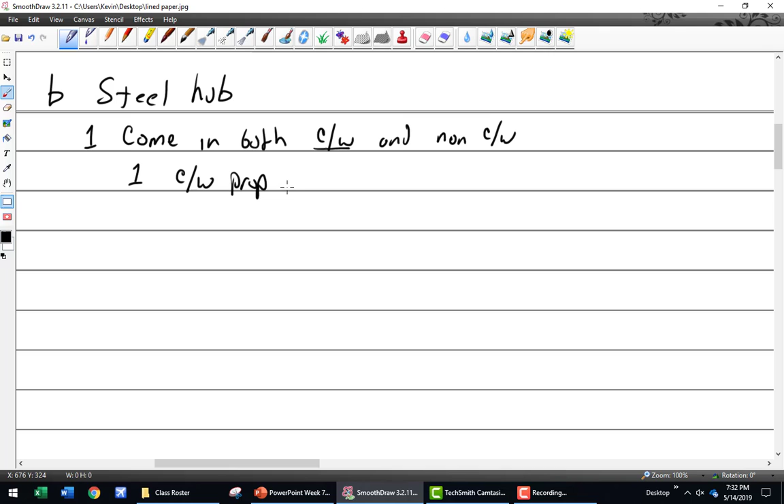While we're here, the counterweighted prop, as a reminder, uses oil to decrease pitch. And then the non-counterweight uses oil to increase pitch.

We do have in the hangar a couple examples of the steel hub. One of them's stuck in a feather position, and you need air pressure to get it out of feather. When you look at that propeller, take a minute to go around to the back of the Bonanza and look at the PT6 sitting there at the propeller and tell me if you see any similarities. I think you will.

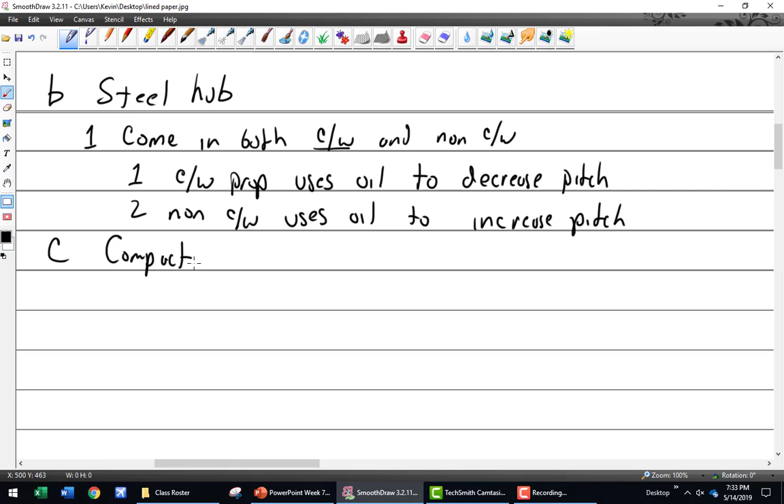All right, the compact hub - that is the more modern style, and it uses an aluminum hub.

Basically, it's the same thing. I mean, we can keep writing it over and over, but let's not. If it's got counterweights, what are the counterweights going to tell me? Centrifugal force is going to take it to high pitch, oil pressure to low pitch.

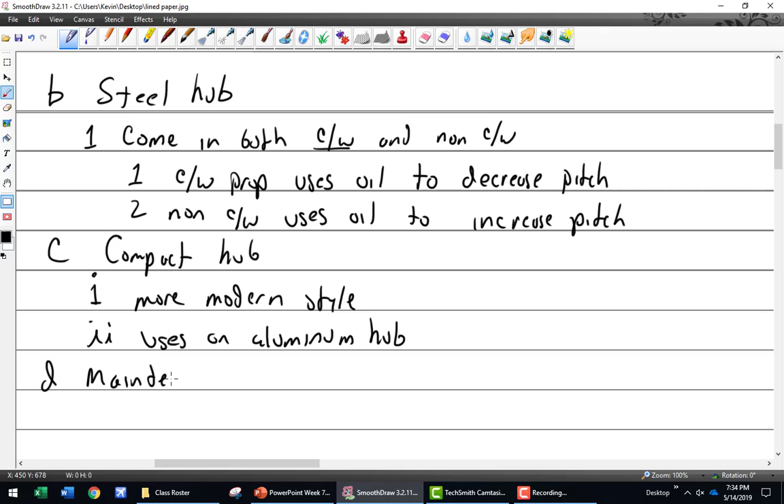I like the maintenance part. So we talked a little bit about greasing - compact props require greasing.

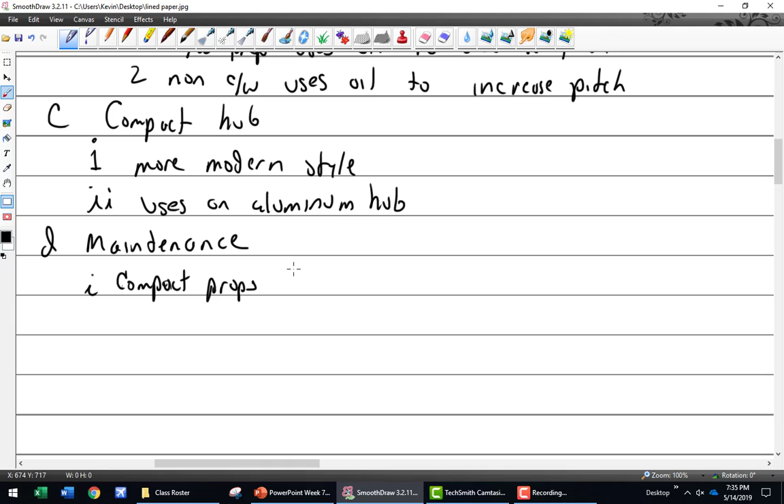What did you discover today with your assignment? I asked Jonathan and company to look up the instructions for greasing the Hartzell propeller that we have attached to the Lycoming. It says every 100 hours or 12 months, whatever comes first.

But if you are operating the propeller less than 50 hours within 6 months, you actually have to re-grease it every 6 months. Then on top of that, depending on where you're operating it - if it's in a salt water kind of environment, close to the ocean - then you actually always have to re-grease it every 6 months.

The amount with which you have to re-grease it, take the fittings out. So here's the part - to grease it, we have the hub, very crude hub, the blades coming out of each side, and we've got one grease zerk here, one down here, one up here, and one over here.

Depending on if it's a tractor or a pusher, you will either take the top or the bottom one out. So we have a tractor, so you have a tractor.

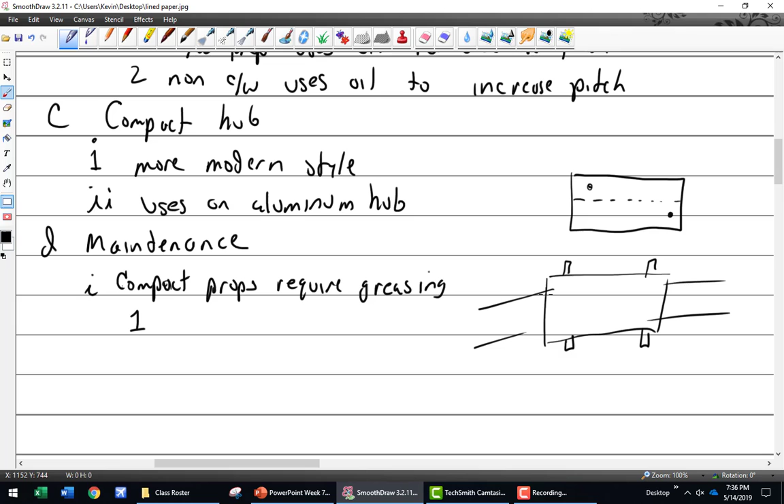So I'll write this down. Tractor style. So what does it remove? It's actually counterclockwise or clockwise. The revised version? Really? Yeah. All right, well, let's go with what you got.

General instructions: remove one of the grease fittings, and then grease it with 1 fluid ounce, which is equivalent to 6 pumps.

You guys got it? That's what it is, right? So you add 1 fluid ounce, which is 6 pumps of grease with a regular grease gun, and then put it back on. It also depends on, there's a little sticker on the hub which tells you which grease to use.

So they were recommending to use Aeroshell number 6, which doesn't have temperature restrictions. If you use Aeroshell 5, which you could also use, you have to label it, and you can't use it below -40 degrees Celsius.

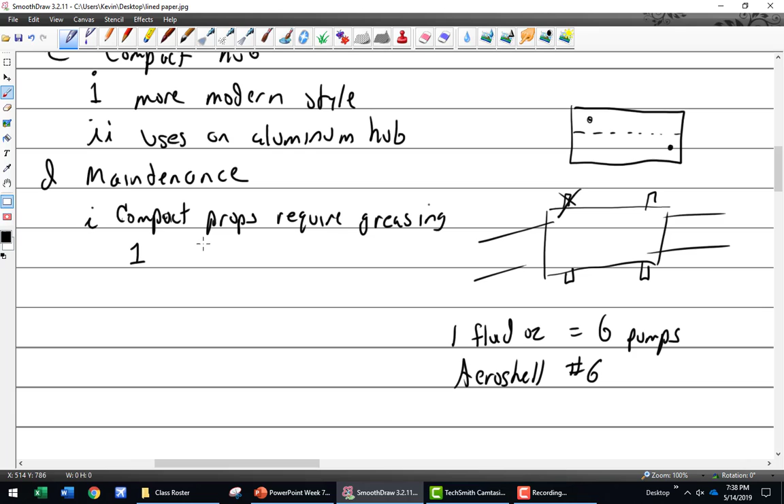All right, so what do we got? Very good, thank you. Compact props require greasing. So, 1: follow the manual, that's the most important thing. Remove 1 grease fitting.

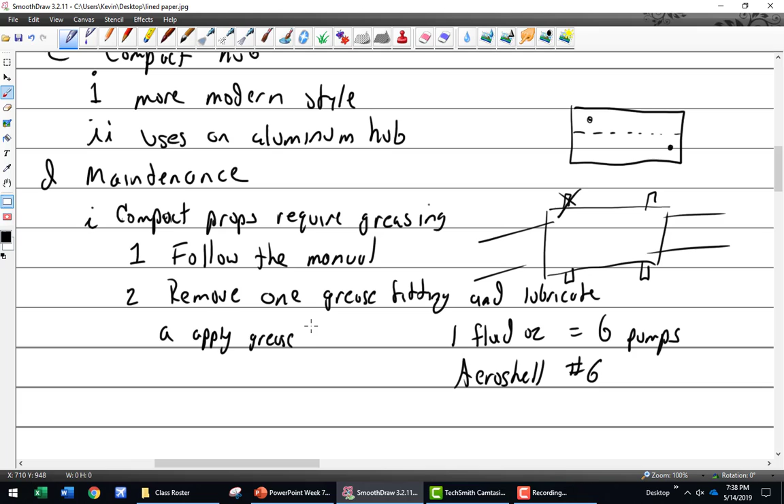And lubricate. Apply grease to the fitting nearest the leading edge. And that's for a tractor style, which would be all normal props.

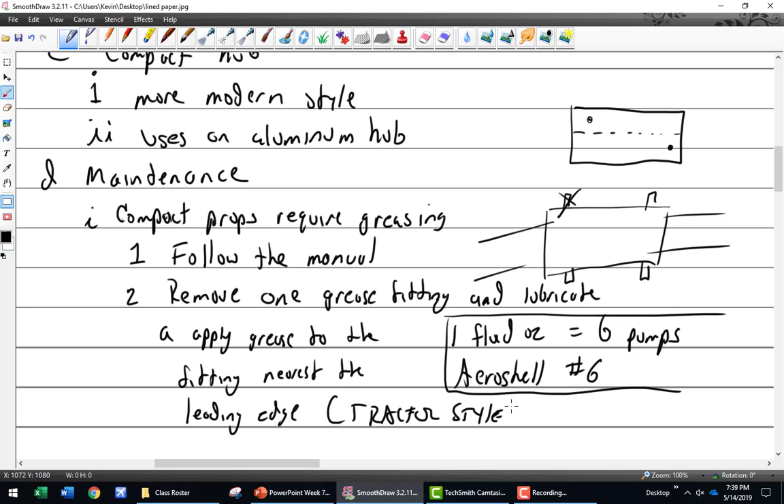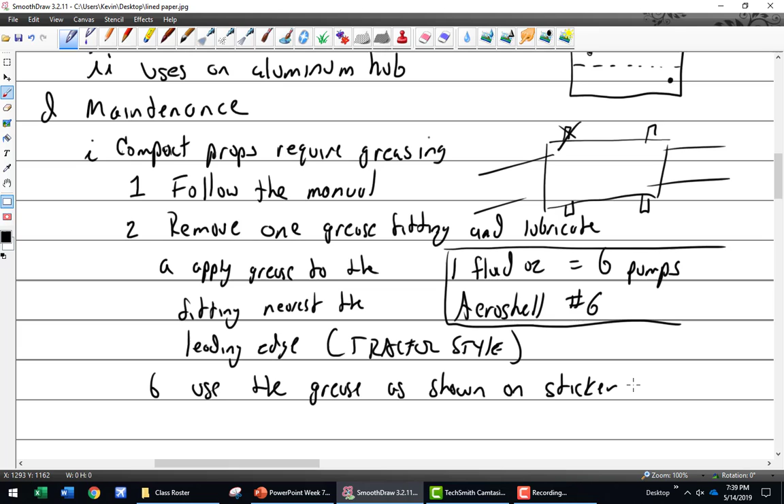Use the grease as shown on the sticker. What if the sticker's gone? Well, then I would call the prop shop and say, what do I do now? And C, it is 1 fluid ounce or 6 pumps.

All right, so let's think about what happens if somebody, not in this class, sees the grease zerks and thinks, I should definitely put some grease in this prop. Without taking out one of the grease zerks, they see 4 of them and think, well, I'll put some in this one and that one and that one and that one. Where is the grease going to go? Well, it will go into the hub, and it's going to pressurize it, and if there's enough room in there, then it'll be fine, I suppose.

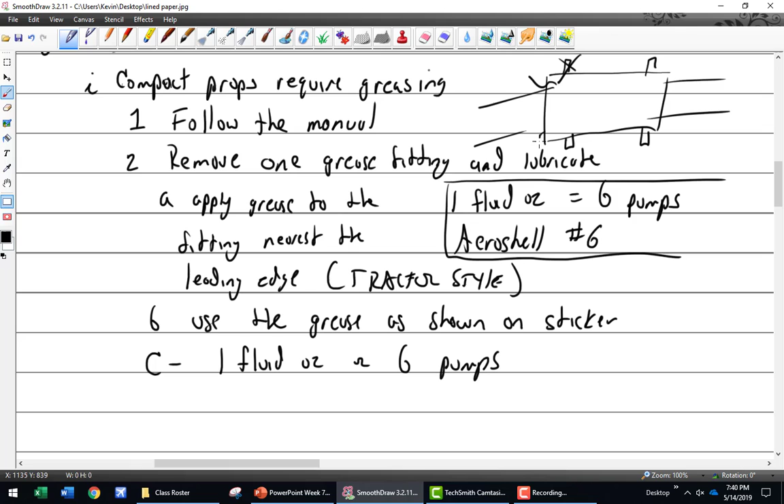But eventually, it's going to fill up. It'll come out of the seals of the prop, and roll down here, and then you have bad seals, and you got to get it cleaned and resealed, and that'll probably lead to an overhaul. Who knows? So that's really bad. So don't do that. All right.

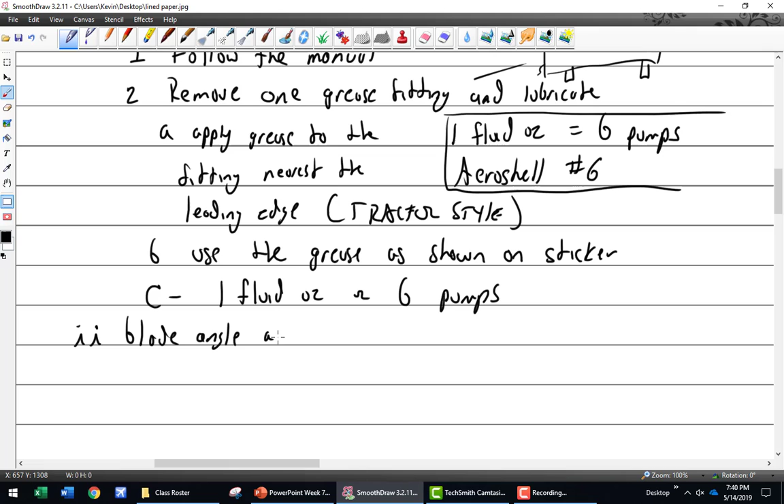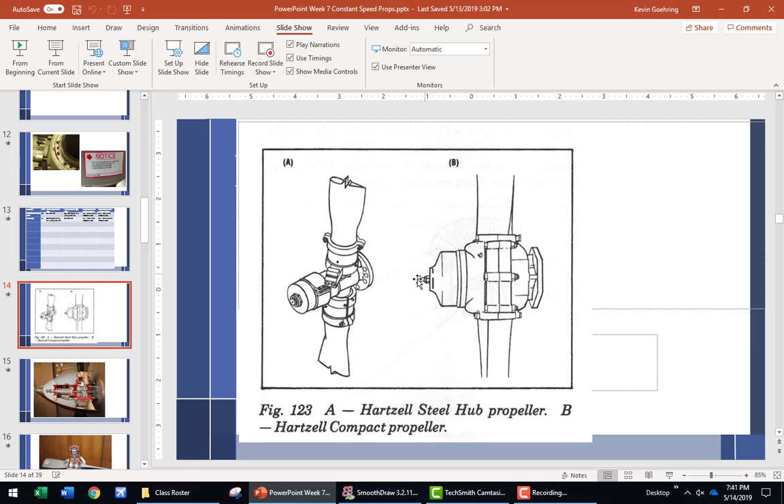One of the things I like about the compact hubs is that you can adjust the blade angle. You can do that with the steel ones too. The steel ones, you loosen the clamp, and then the same way you adjust your ground adjustable, you actually adjust it. I don't like doing those, but this one's really easy. And normally I don't like doing a whole lot with props, because there's just a lot going on.

But I can adjust the low pitch stops right here. There's a screw, usually not a bolt, usually an Allen wrench, and a stop nut. Undo the stop nut, turn it in, and you can adjust the low pitch stops. So you can actually adjust it here instead of at the governor. Don't do it unless you follow directions, but it can be done.

All right. Blade angle adjustment. Let's see. 1, steel hub props. Steel hub props can have low pitch adjusted by adjusting the blade clamps.

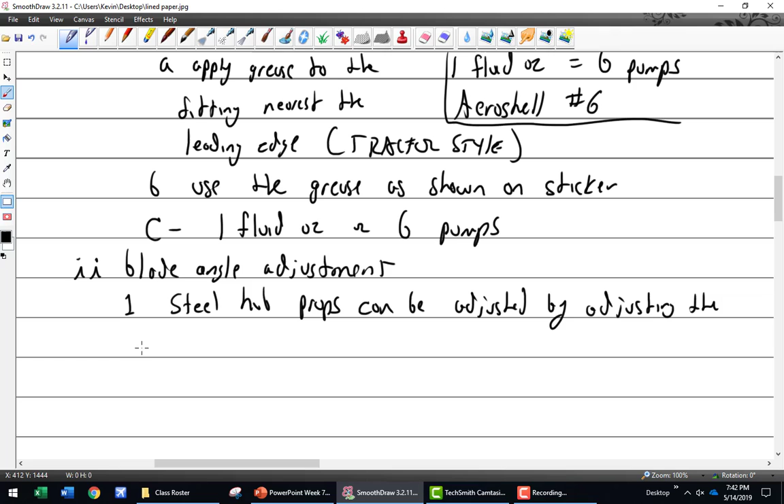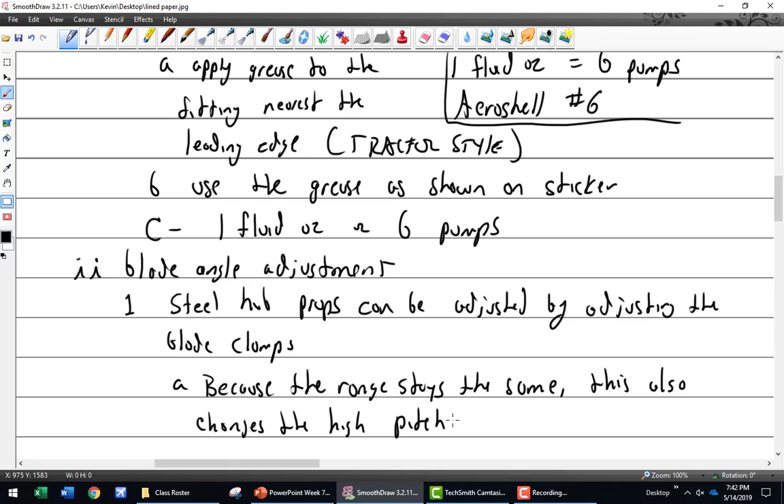This also changes the high pitch. And to the compact—

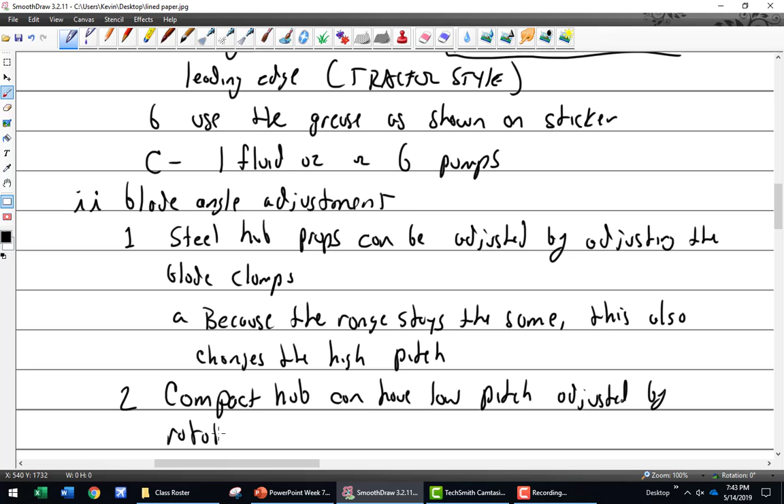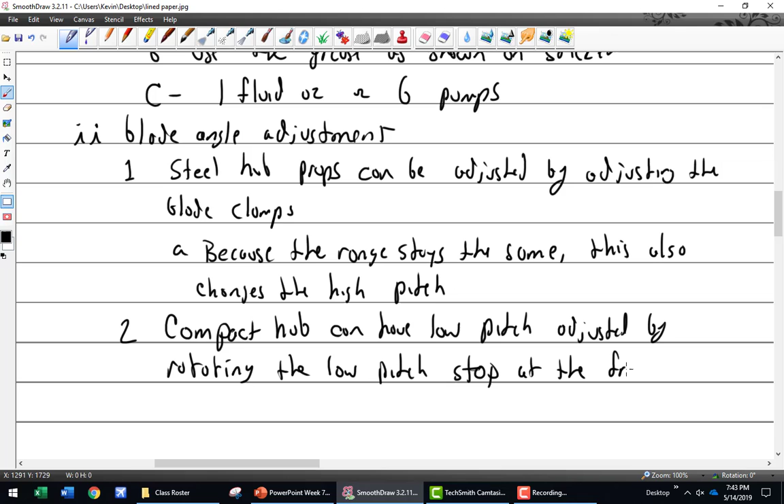Compact hub can have low pitch adjusted by rotating the low pitch stop on the front of the cylinder, by rotating the low pitch stop at the front. There we go.

So what have we really talked about, which props? Pretty much, well, we talked about the Hartzell, which is what we talked about there. We had the McCauley, and then Hamilton counterweighted. All right.

And let's bring it up to feathering props. But before we do that, we'll jump over to here. Finish up on this—so we had Hartzell, did the steel and the compact.

There's the inner workings. So what do you suppose this one is? Steel hub. Why do you say steel hub? Boy, it's hard to tell with that thing. Because the mechanism is outside—we have some mechanism here, but I don't see any up here. It's on the other side. No, I don't know, maybe that one's a little hard to tell.

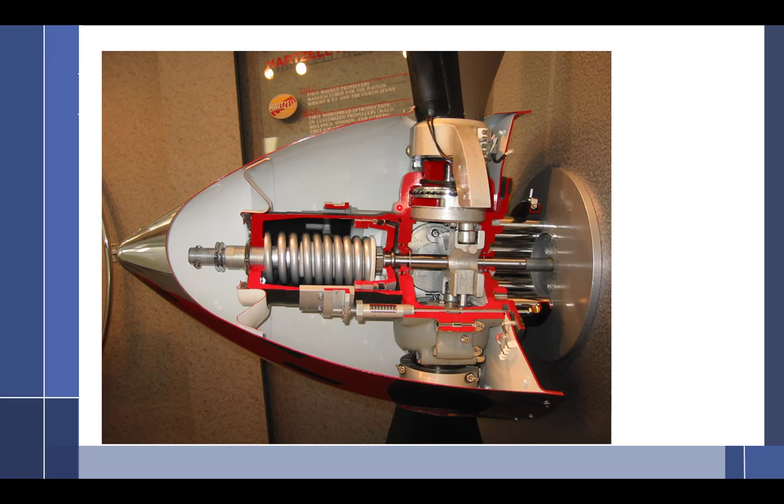All right, but we didn't even get into this. This one's feathering, and I can tell because of the distance between here and here. So we'll talk about that one.

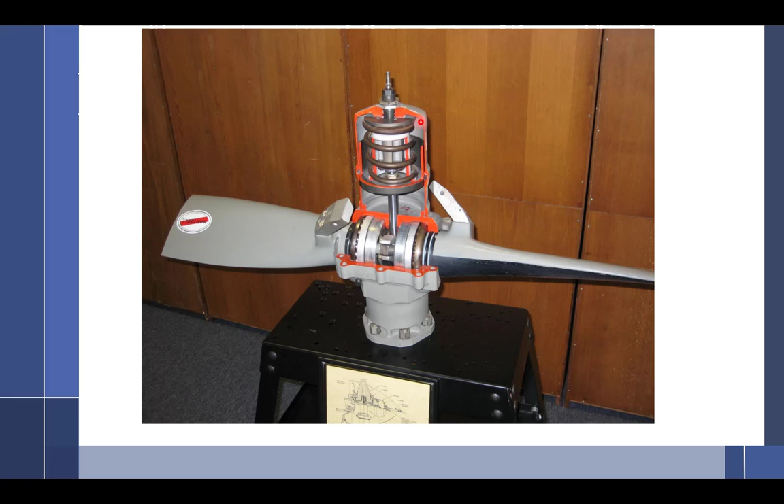Another Hartzell. Oh, this one's easy to tell—this one is compact hub. Is it feathering or non-feathering? Yeah, it's feathering. First of all, because it's got counterweight, so it's going to go on a multi-engine, and the distance between here and here is much greater. If it was very short right here, then it'd be non-feathering.

So I think we'll be looking at these in a little bit. There we go, we can look at that. So we talked about the Hartzell steel hub non-feather and the Hartzell compact non-feather. Do we have counterweights? No.

What moves the prop to low pitch? Centrifugal twist. Centrifugal twist. What moves it to high pitch? Oil pressure, oil pressure. You seeing a pattern? I hope so.

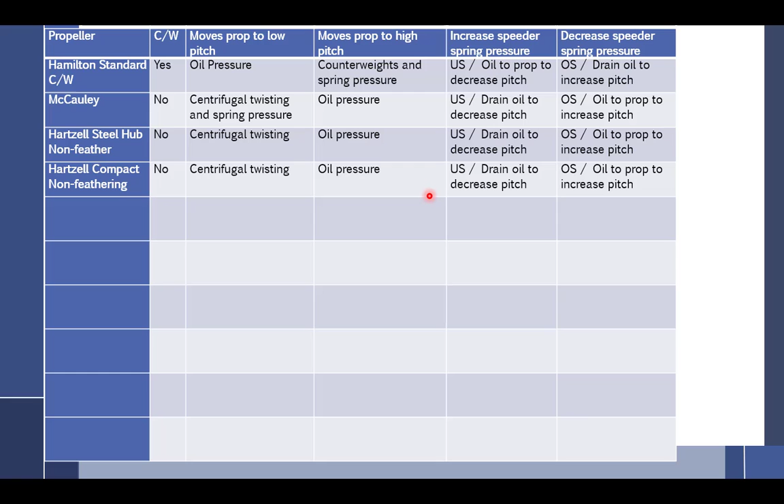All right, feathering props. What's the purpose of a feathering prop, which you've really already talked about? Why do I want it to feather? Keep it from windmilling. What else? So windmilling, huh? Reduce drag. Drag, okay.

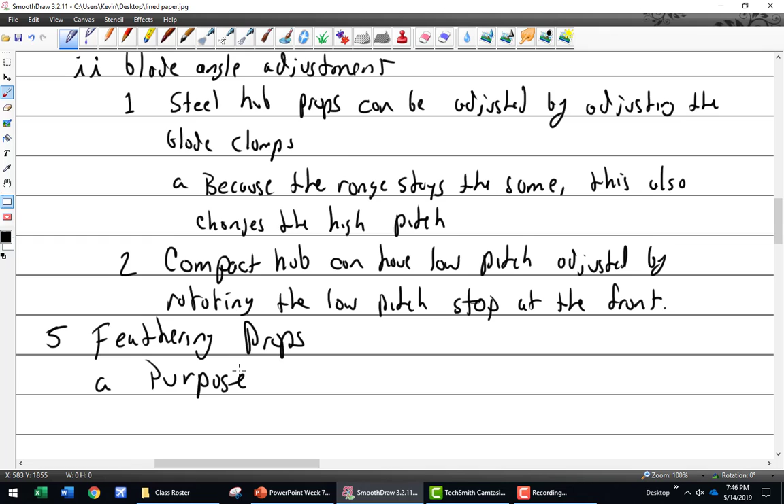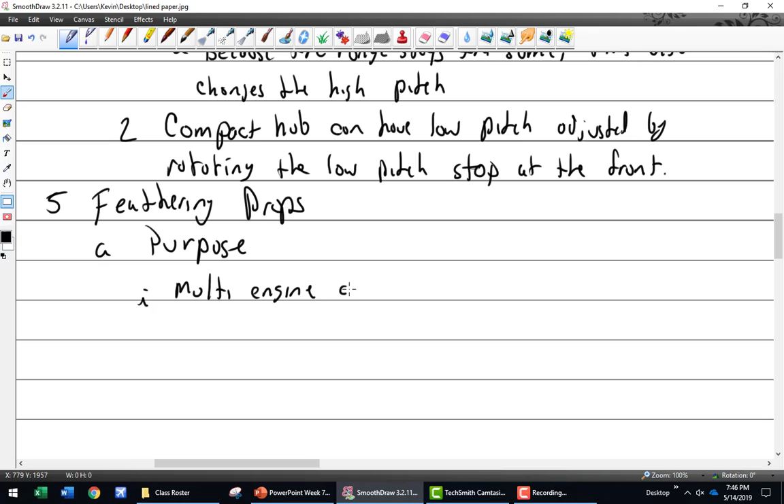Prop motoring the engine—prop motoring the engine, I like that one. Multi-engine aircraft require feathering props to reduce drag.

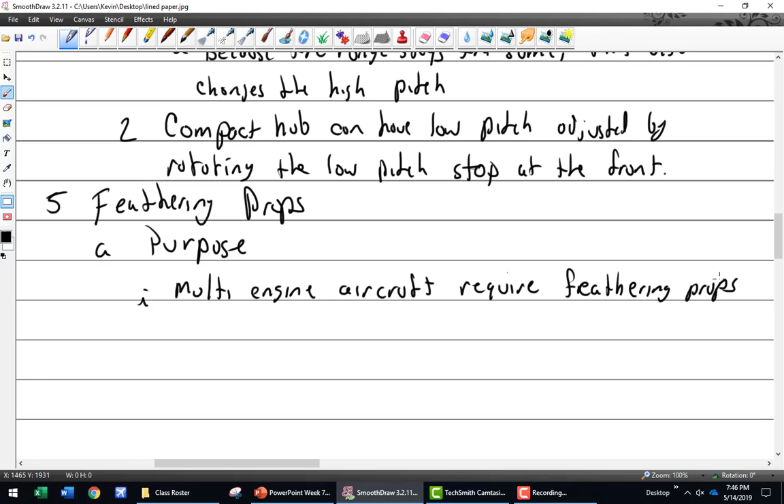Should that engine quit, it's very important to feather the engine that actually quit, and not the other one.

So feathering—what feathering means is to rotate the propeller about 90 degrees, which is the blade directly into the wind, in order to stop the engine from windmilling. So feathering a prop means to rotate the prop

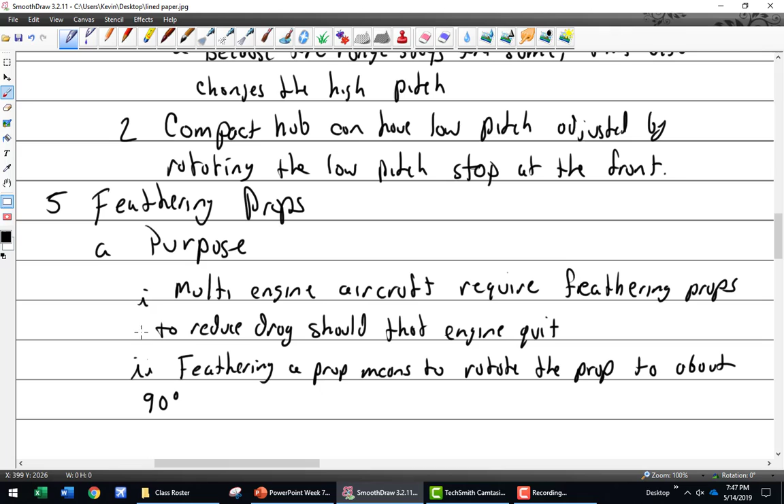to about 90 degrees, yeah, a 90 degree blade angle, which is blade directly into the air. Well, that doesn't make sense—but directly into the, what should we put here? Relative wind is perfect. I like that, directly into the relative wind.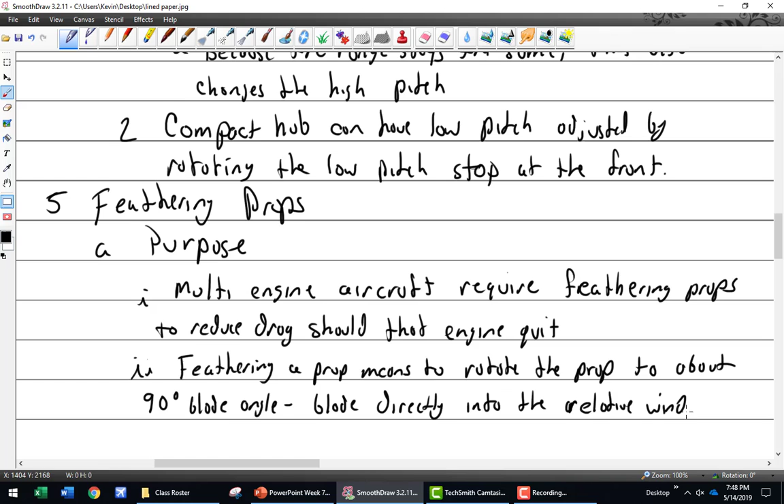And the relative wind is coming straight at the aircraft because the engine is not moving. If the aircraft is moving, the engine's not moving. If the engine were moving, then relative wind would be somewhere else, and why would you be feathering it, right? All right, directly into the relative wind, I like that.

In order to stop the engine from windmilling.

I don't know of any piston aircraft that has a feathering prop—it's single engine, so very few, if any, single engine piston type aircraft use feathering props.

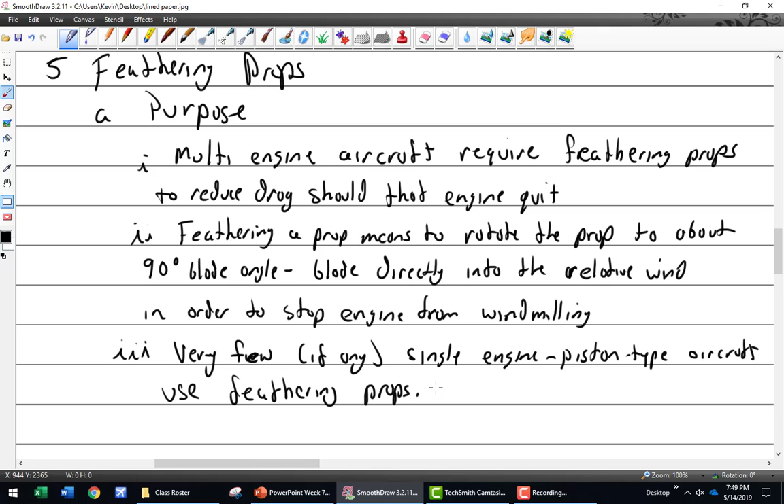However, turbine engines do, so that would not be so uncommon.

And why does everything go backwards once we get into feathering props? I mean backwards, the airplane doesn't go backwards, but why do we have this whole problem? Wouldn't it just be a lot easier to say, okay, governors always make props go to high pitch, and centrifugal twisting force always makes the prop go to low pitch? Wouldn't that be a lot easier?

Sure, but that's not how it works. Well, why not? Why couldn't we make it that way? Because now you most likely have counterweights on it, which is usually used for feathering. Well, they had to put the counterweights on.

Well, why not? Why couldn't we just use oil pressure to make this thing go all the way to feather? Because we won't have it. Because what if you lost oil pressure? What if you lost oil? Exactly. I will get into that later.

So yes, everything goes a little bit backwards. Well, I don't know, then I guess you have to ask the question: then on singles, why didn't they make the singles work that way—oil pressure bringing it to low pitch and just letting centrifugal force off counterweights make everything go to high pitch? I mean, why do they go back and forth?

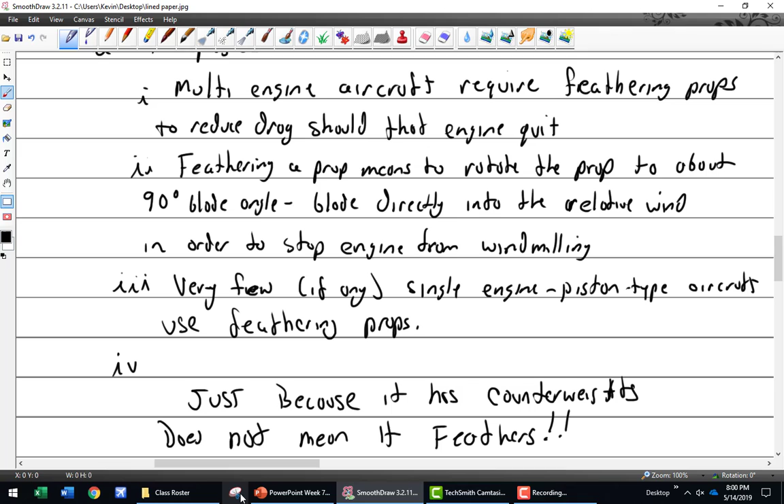So, anyway, that's what I get for trying to have a decent conversation with you guys. It just goes to hell in a handbag. Ten minutes later it's like, because it feathers? Oh no. I don't know, let's restart. Let's go again, start from the top. Turn off the recording. This didn't go well.

Well, do I want to write this? In the event of an engine failure or loss of oil, the prop needs to feather without the use of engine oil. I better write that down: in the event of an engine failure or loss of oil, the prop needs to feather without the use of oil.

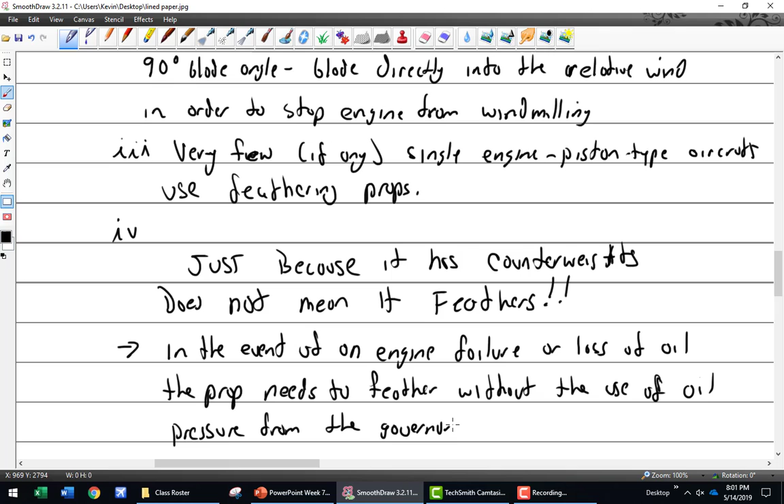From the governor. That was never in dispute, if you relate to the conversation. That is why twins are set up the way twins are. That's a given, an easy one to figure out. There's not much involved in thinking that one through. If you have a loss of engine oil or a failure of the engine, you must be able to feather your twin. That's why they're made that way.

I just found that the reason a single does not feather is because if there's governor failure, you can still fly the plane. Or if there's governor failure and it feathers, it will feather and you can't fly the plane anymore.

Okay, let's get this straight. But on a single, my question never had anything to do with feathering. The reason... why didn't it just go to high pitch? Because of governor failure - if the governor fails and it goes straight to high pitch, you can't fly the plane if the engine's still running. Whereas if the governor fails in a single, it will go automatically to low pitch and you can still fly the plane.

Okay, let me ask an expert. Juan, I'm not sure, but what would happen if your plane got stuck in low pitch? No, we can still run it, you just need to be gentle with the engine. Okay, that's my thought. So what's manifold pressure going to do? It's going to go real low.

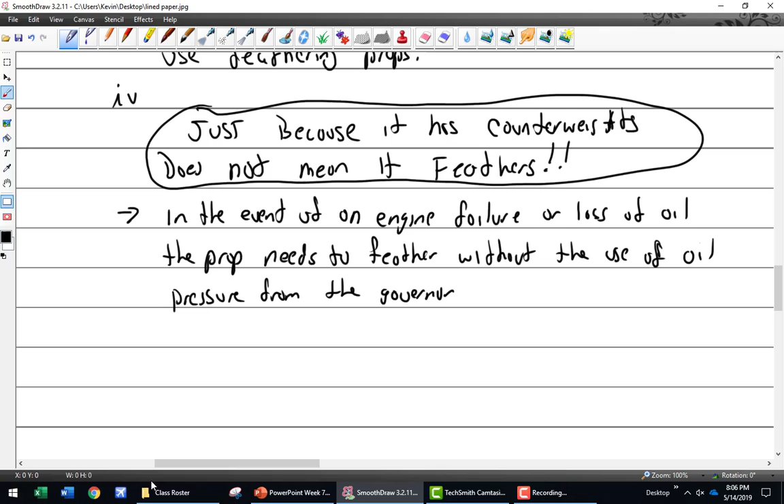I don't even know what to do now. All right, you guys are making me crazy.

Your scenario: you have an engine running, but a dysfunctional governor that set the propeller to high pitch. So follow this: if the governor on a single fails, that bolt finds its way through the screen, gets into the governor, seizes up the governor, the shear shaft is going to go, and the governor's going to fail to move.

On a single, the way it's normally designed, what's the prop going to do? Low pitch. All right, what's manifold going to be? You're going to be acting kind of like a fixed pitch, but kind of a flat fixed pitch. So you don't have this manifold pressure problem.

Turn the whole thing around, and let's say the engineer says, 'No, I'm going to make my plane, and I got a good deal on a bunch of counterweighted props, so I'm going to make my single engine aircraft that way. If that same scenario happens and the governor fails, mine's going to high pitch. I'll put some stops in there so it doesn't feather, but it'll go to high pitch.' Now I can see we'd have the problem with manifold pressure going high, and it may be a little more difficult to manage the aircraft. Would you agree with something like that?

Still pull the throttle back to reduce the manifold pressure. Okay, but you're going to be losing some power, I think, and it'd be harder to manage. Maybe they even took that into consideration when they decided to put no counterweights on single engine props.

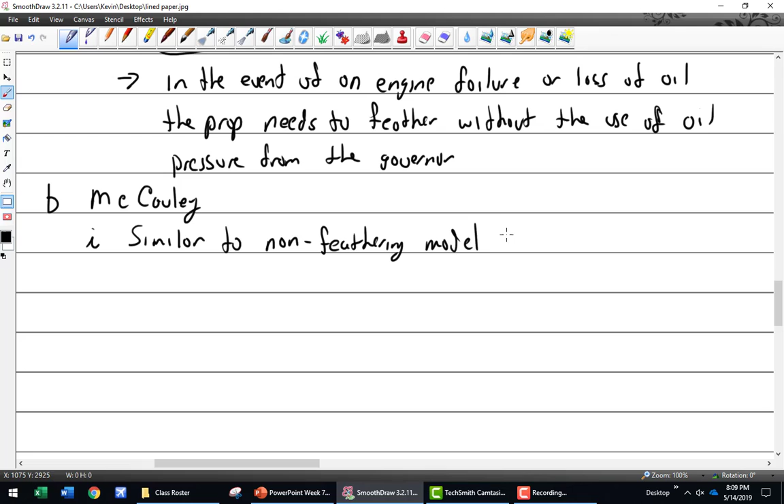All right, so the McCauley prop. What about the McCauley? I think we can say this about all of these—it's similar to a prop you probably don't know anything about at this point: a non-feathering model, but one that uses counterweights.

Surprise! Wait a minute, Kevin.

You're telling me you have counterweight and spring pressure too? All right, fill in the blank: increase or decrease blade angle? Increase. You're just saying that because there's a big space. It's like, what word would fit in there the best? They're the same length. I know, but it took you a long time to realize that, didn't it? Increase blade angle.

Oil pressure... to decrease. Decrease what? Decrease blade angle.

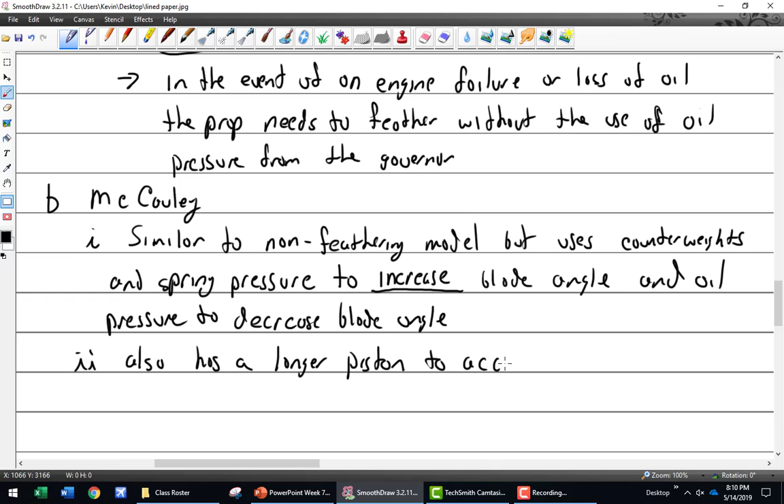All right, it also has a longer piston to accommodate longer blade travel. Probably the stroke, right? Yes, call it the stroke if you want.

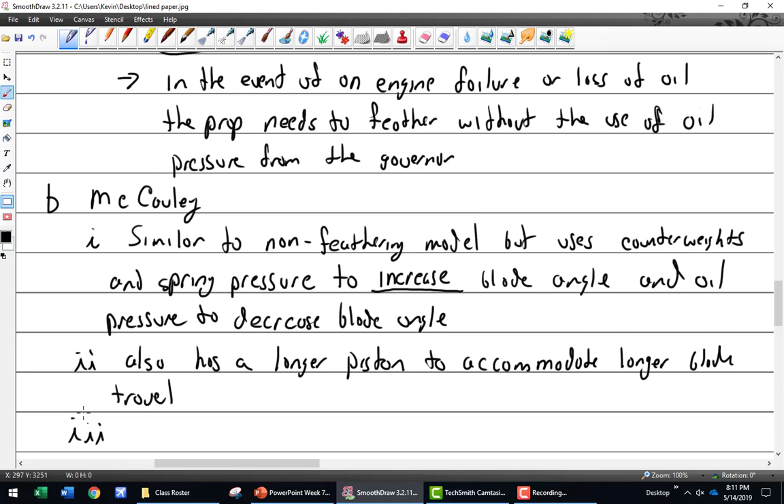So we'll just stick to some basic facts here then. Prop is counterweighted and spring-loaded to feather if oil pressure is lost.

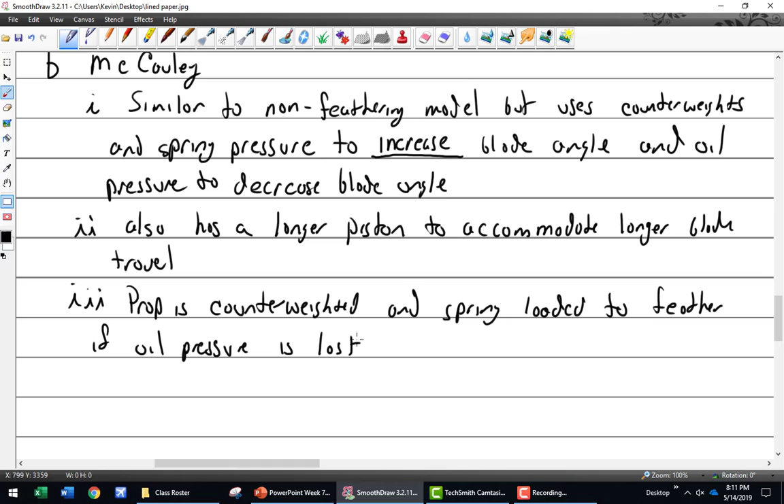All right, but that brings up a whole other problem. What happens when I shut down a propeller that feathers when I lose oil pressure? Don't I lose oil pressure as I shut down? I'd say so. So how am I going to shut down my engine to keep oil pressure? I know, I'll pull the mixture back. There you go, and that way I get an RPM rise before it falls and the oil pressure goes up. Then it quits and the prop stays, right? No. You can give it a try though.

Accumulators? Accumulator, nope. Prop lock? What? Prop lock. That's the thing you wrap around the prop when you have your aircraft in Rio Linda, to keep people from stealing it. Or when you don't pay the rent fees. Kevin, aren't you across the runway? That's not Rio Linda, is it? No, Rio Linda Airport's over there, over the bridge.

Yeah. To prevent feathering during shutdown, a centrifugal latch is used.

So what happens, and there are different types, but basically what the prop's going to do is, when I bring it back to idle, there's not as much centrifugal force. So springs will work, it kind of works backwards, but springs will pull something in, we'll say. So there's not a centrifugal force, these latches can come in and grab onto something.

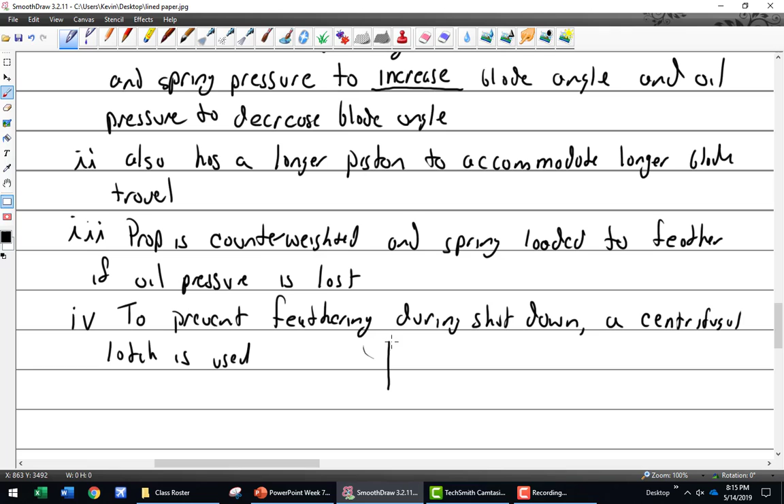One more time, I have a couple questions. Is there a point at which the propeller blade passes to where it's considered feathered? Because I'm thinking you have low pitch, high pitch, and then it goes to feather, which is completely different. Yeah, exactly. So it's not like the prop works in this whole 90-degree range. Plane of rotation: here's 0 pitch angle, here's 90, which is feather.

So operating range, I just got to make up some stuff right here. Operating range, we'll say, is like this in this area. So this is the operating range. It doesn't usually go to 0 unless it's got a beta range on it, which is a reversing propeller, we'll talk about that later. So it has this operating range, and it's going to normally work there.

Then when you go to feather, this is the feather area right here. Otherwise, if you go to low pitch, it's not going to go all the way to like 90 degrees. No, it doesn't do that. It just doesn't do that. Is that what you're asking? 'Cause that's a pretty good question.

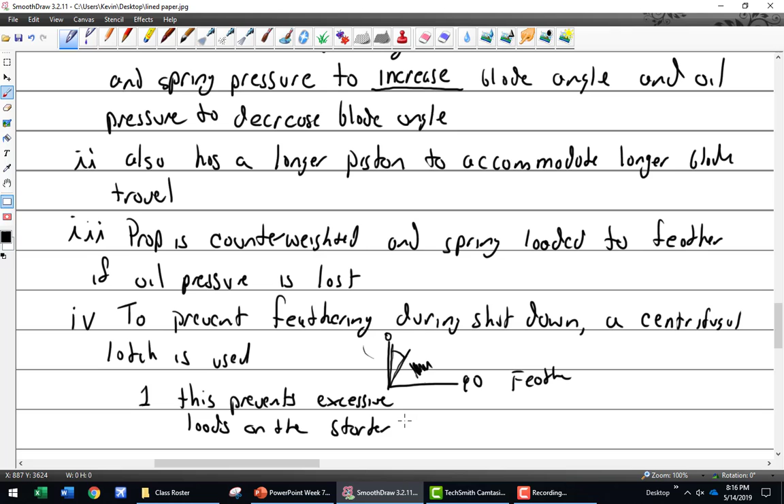All right, centrifugal latch is used. Why do I want a centrifugal latch? This prevents excessive loads on the starter. Under about 900 RPM, the latch engages.

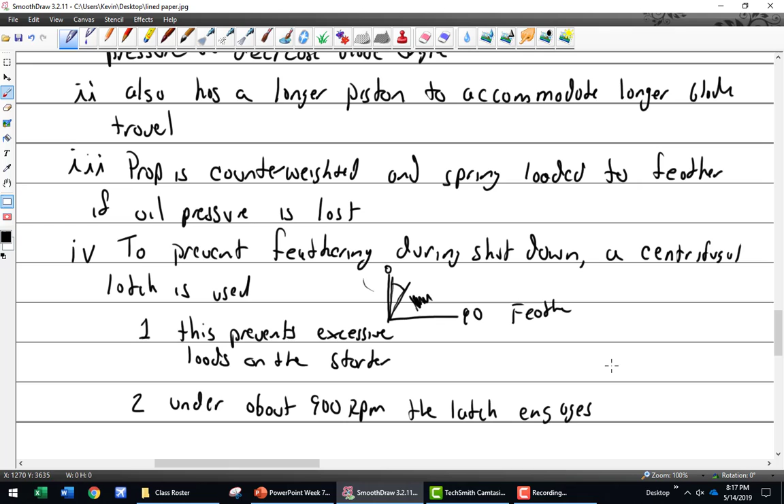Well, let me ask you super mechanics this question. Oh, you're really gonna get it done now, aren't you? No, I actually have some faith, maybe some people can pull this one off. Is this my phone or Juan's phone? It's Juan's phone, take this back. See so much of it. All right, why are you looking?

Okay, so this is very true on piston engines, right? I'm talking about piston engines and this drag on the starter. You guys studied turbines with Phil, you studied PT6s and stuff like that with props on it. What position do you put the prop in when you shut down? How come?

Go ahead, why? Because otherwise the propeller would keep on spinning forever and ever, probably 20 minutes or even longer. Because once the turbine is shut down and there's no resistance, it would just keep turning and turning and turning. Okay, so you got this thing turning and turning.

So, I mean, it looks kind of cool, doesn't it? What's the big deal? Kind of for safety reasons. If someone wants to get closer to it - I'm very Darwinian when it comes to safety issues. No, I'm not, I take that back. Safety first. So, safety reasons. But honestly, my default is always - I used to say, hey, if that thing's going to fall, throw yourself under it, because if you get hurt, you'll heal while you sit at home and watch TV. I got to fix that. Right? So always default to the maintenance aspect.

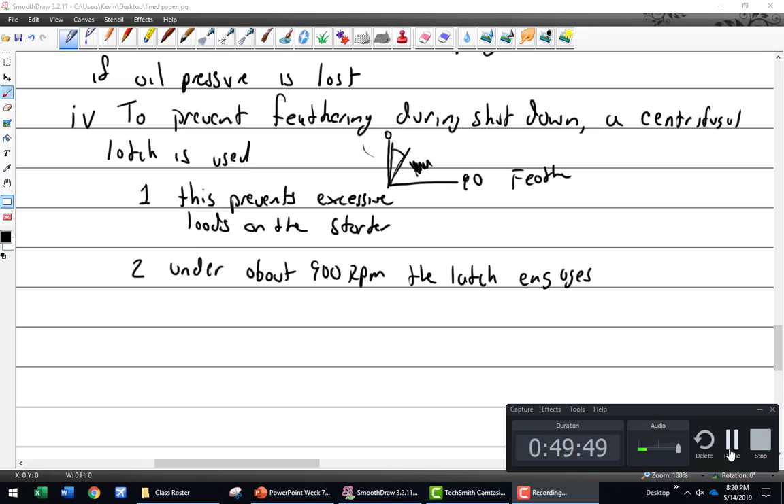All right, so managed to somehow survive for 49 minutes. Take a break. I survived anyway.